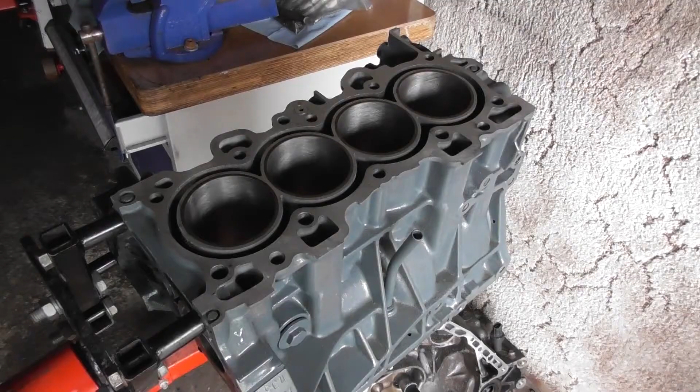So as you know, I've taken the wiring loom out of that other car and I want to put it into the EF. I've got my ghetto lighting rig here, so you're going to have to apologise about that.

What I need to do is take the interior out of this one, or at least take the driver's seat, possibly the passenger as well. I haven't got a lot of space in this garage, but I'm going to try and take it out, stack it in the corner, and see how I get on with that. But I need to remove some stuff first - drop the steering wheel down, the column down, and begin the process of taking the dashboard out.

So I've taken the battery out to begin with. You take the two 12mm at the front, put the seat forward, and take the 12mm out the rear, and then this seat is good to come out. I'll do the same to the other one.

Right, this is a better setup with the light shining through the sunroof. Anyway, I've taken the front two seats out, and then I'm just going to take the back two seats out.

So these upper bolsters, they get taken out with this. If I just lean, obviously put the seat forward, comes onto this. I'm sure everyone knows this. Take that out there, okay, top side of the seat. And you'll see this comes out then. Then you can just take it forward. So there's one, do the same to the other, and then you'll have both of them out.

Reveals the 10mm, here. And then you can just basically pull this up and then take this whole seat out. And it just reveals the fuel pump, things like that.

But the logical thing to do next is take out the central console, and I've already taken out the fuse cover - you can't see a lot of this stuff. So you just take out these 6 in total crosshead screws, one there, one halfway up, one there. You have to drop the dashboard, drop the glove box down to reveal that one, and then this will come out forward.

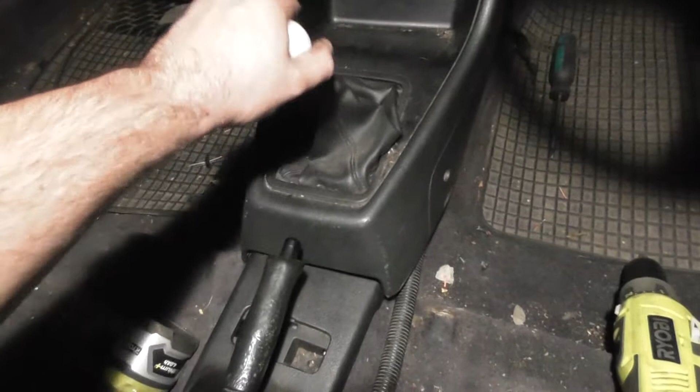Then you're going to remove your gear knob anti-clockwise, and this one, I'll eventually get it off. Alright, this is a nice Buddy Club neoprene one, nice. Put that to one side, and yeah, drop the gear stick back, and then we should just be able to pull this off.

The handbrake's out the way. Well, I'm not going to do it with one hand, but either way you get the idea. Just be careful as you pull that out of here. So handbrake up was easiest, so that's taken that out. I always leave the handbrake down on Civics because of the mechanisms and the brakes get stuck.

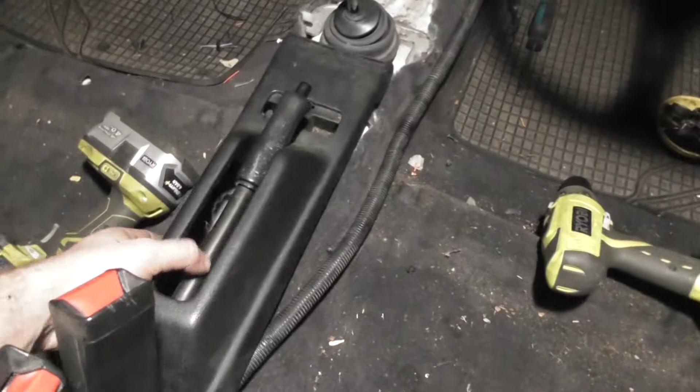These bolts are long gone for this thing, so you should just be able to push that forward maybe and jiggle this out the way. Maybe up. Yeah, up again. It's better, that's out the way.

Okay, then we can take the glove box out, and that is just on some screws on the right and left at the bottom there. So glove box out the way.

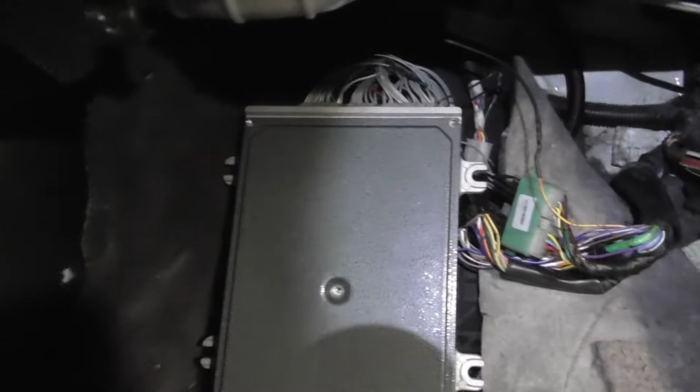Then this ECU would usually be under the carpet, I guess. So probably not a bad idea to undo that, put that out of the way. And then it's just you need to undo these screws around the heater controls, and yeah, you can take off this at the same time, but I don't think you have to. But I'll probably just take as much out of this as possible to make it easy to manoeuvre.

Okay, so ECU's out. Obviously take the lambda gauge out, and that was all non-OEM wiring anyway. But yeah, this is just for the stereo, so that can go back. And then yeah, I can drop this steering column down.

There's this little retaining clip, a little C-clip that needs to be popped off, and you can take this whole bit of plastic off, drop this down, but not before undoing the couple of connectors which are connecting the steering - the key barrel 3-pin connector, which goes to here, and then we have this 4-pin connector which goes straight in there, which is the 4-pin connector that says A next to it on the fuse panel.

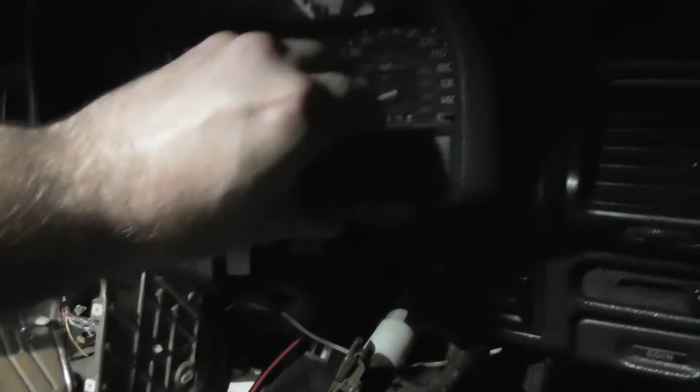So that means I can drop this down and begin working on taking other things out. The next thing will be the binnacle here, so I'll undo that. I think it comes out by just taking these switches out. The easiest way is to get a non-mar tool and prise those two switches out. I believe there's two screws behind them, so we'll do that.

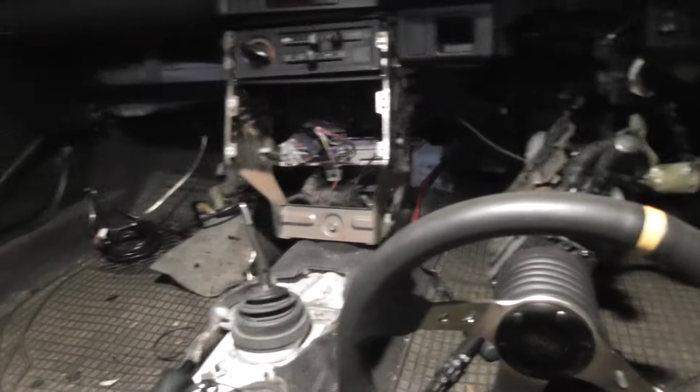I'm back in the car, and we've got a change of idea. I was going to put that loom in that I've taken out of the other car, but I've managed to secure myself a loom from a CRX VTEC 1.6, the OBD0 loom, and I'll take you through what I'm going to do with that and some of the reasons behind it. Some of it's due to getting the indicators and the dashboard working like stock, which is going to be difficult, realising the clocks from the other car are going to be very hard to fit. So I think I'm going to fit that loom instead, but either way, I'll show you what I'm going to do.

And that means I really want to get these stalks off as well, this whole column off. So I'm going to use the column from the VTEC as well. This is from a shuttle, the older style shuttle, 88 to 89, it's got the hazard switch on top. I really just want all the switches and connections to be the same, so I need to take the steering wheel off.

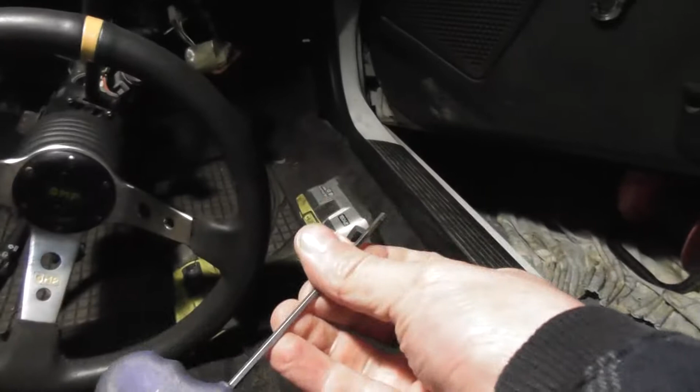So I'm going to undo these Allen bolts for this aftermarket steering wheel, and then take off that central nut after that. So take off the Allen bolts first, with a little 3mm Allen key.

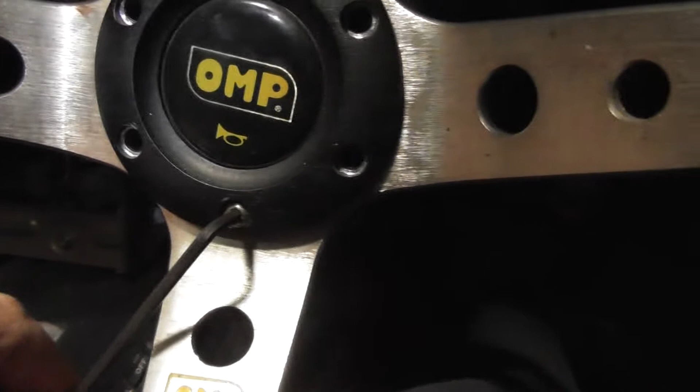We've all had this happen to us, but the Allen key on one of them was a bit rounded, and as I took it out, the 3mm Allen key started to slip. But fear not, I've got an Imperial set as well - 9/64, hammered that in, and then I'm actually undoing it, so that's nice. The tip is to use a slightly different size if it goes a bit rounded, hammer that thing home, and hopefully you'll be able to undo it.

So good luck. There we have it, I've undone that. This ring comes off first, then this little horn, and it's got a little connector on the back here. So that's undone, horn comes out, and then reveals this, and then I can just undo this main nut and take the boss off. I might have to connect it back to there to do that, so we'll see.

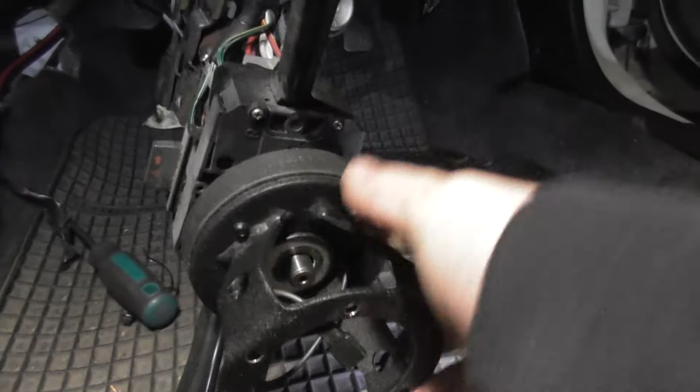So, 19mm, we'll see. There we go. Yeah, that's that, and that's the boss off.

Now I can just take - I think there's a 10mm down there - and take the column off. Taking this bit of plastic shrouding off the column reveals this little 10mm here, so I'm going to undo that, and then just take the whole column out.

Okay, so that's been taken out, and I've got the 10mm bolt here, I'll just put that back where it was, and then just undo these clips for the stalks, and then take the column itself out.

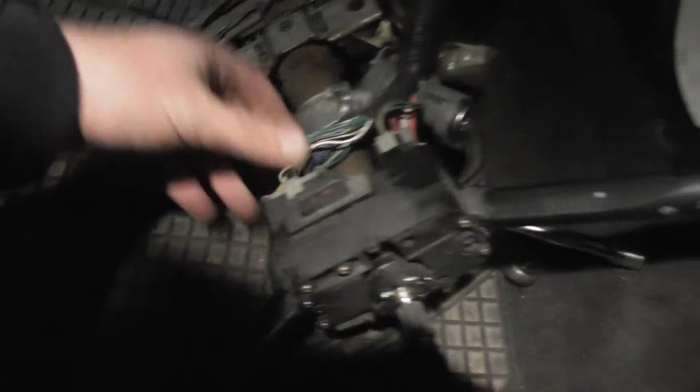Now it's time to take the dash clocks out. Here you need to take this binnacle out first. There's one there, and there's one under here, and I believe there's two actually. Let's have a look. Right, yeah, look here, you can't see, but there's one here underneath this thing, and there's another one under this cover here.

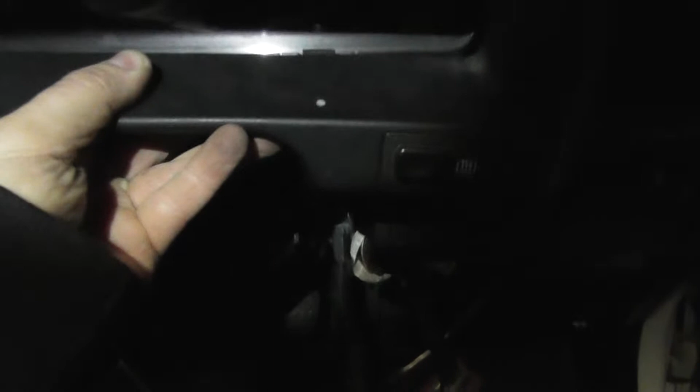So that will reveal the dash clocks themselves. And when that's moved forward a bit, I should be able to push these two switches out the way, forward towards me, and that will enable me to take this whole binnacle out. Okay, so with those removed I can take this forward, and obviously there's this shift light, glow shift light thing on. I'll have to cut the wires for that one, but I think that's only got power, earth, and the trigger, the blue trigger switch wire. So I'll remove that and then take this binnacle out of the way.

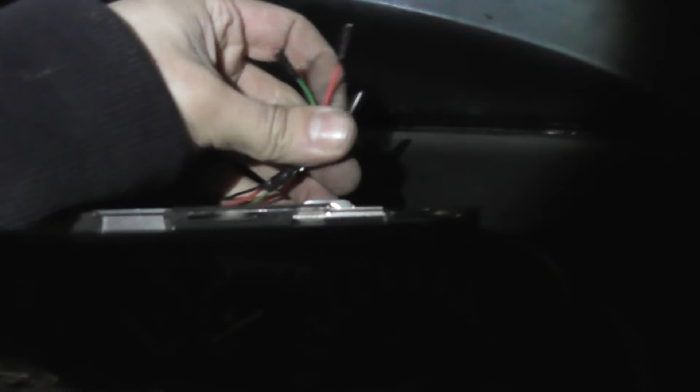I was saying before, reaching behind here when this whole thing's out means I can push these switches out enough to reveal the connectors on them. So I'll just undo that - the 3 wires that have been snipped. We've got the power, the red one, ground, black, green is the trigger, or the tacho switch.

This is the speedo cable. You can just press on the side here, on the side here, on the side here, and that removes everything from the back. Then we're getting very close to actually removing the whole dash.

Removing this dash, there's a number of key points. There's a 10mm bolt down here, and up here you can see that on top of the dash. You need to come in here with this kind of tool, lift this up, and this reveals a 10mm there. The sides here, see there's a 10mm in the air vent.

Usually that's got a screw above it, but I think that's missing. Anyway, remove those and get those 10mm out of the way, and then I don't think there's a whole lot more holding this in. Pulling this side cover off and taking that 10mm out. Shouldn't forget the one under here, and the same the other side.

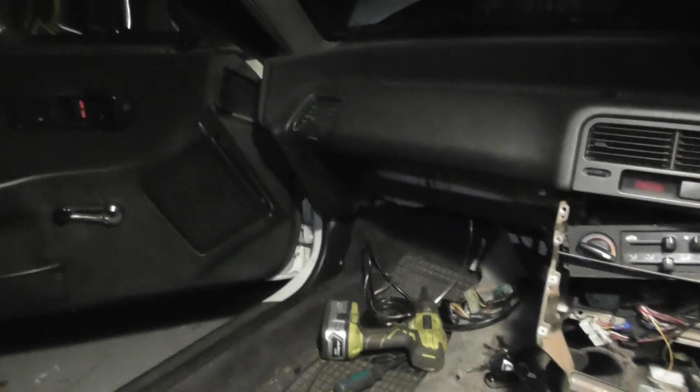And then this whole dash is pretty loose. So I'll have to do the same other side. I've got that other 10mm bolt out of the left hand side, and I've taken a couple more screws out of holding this dash in.

There's one underneath there, which was a 10mm, and there's also another one behind the glove box, which is a screw but with a 10mm Honda kind of thread screw there. And then this I think is ready to come out now.

Yeah, so I can take the whole dashboard out. Got to be careful because there's connections for the clock and stuff. So I'll just see if I can undo that.

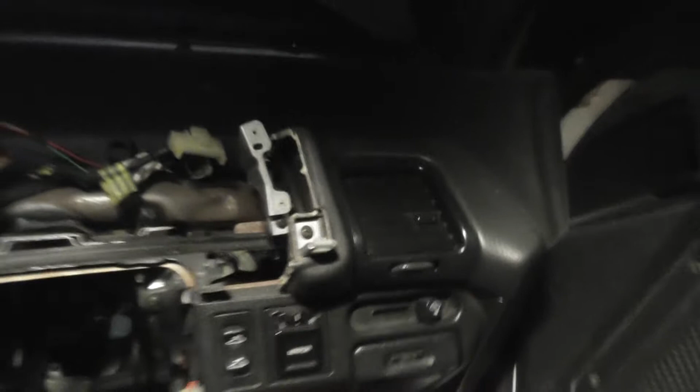Also there might be a connection over here for part of these switches, so I'll just pull out the switches. There's a little thing, I don't know if that's connected or not. There should be a cable connected to that, the recirculating air or not flap. So just take those out and then take the whole dash out.

So now it comes to the point where the dash is out and you just need to take out all the cables that are inside here. I'm going to mark some of them up as well, and just try and pop as much as I can through the firewall, or some of it will actually have to come from the firewall through here, so I have to figure that one out.

So really it's all just kind of basic stuff of the wiring here now. As you know, I'm going to use a different loom, so I need to just get all this stuff out. So that's what I'm going to do next.

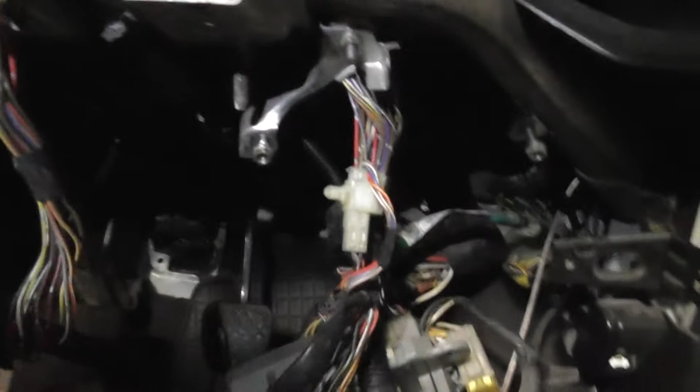So I've taken the fuse box down. It's just on these little 10 mils, and then the whole thing comes down. And then there's other stuff such as the brake stopper. So I need to take that, and basically just keep on working through and try and disconnect as much stuff as possible.

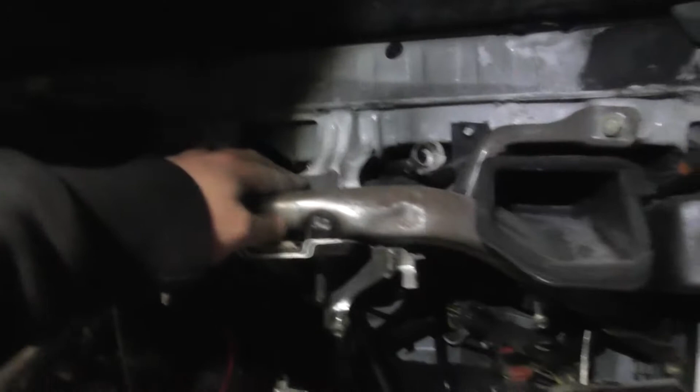So these are just on 12 mils. There's two here, there's one here, there's one here, there's one here, and there's at least one down here. So I'm going to just try and remove this bar now, and that will probably give me some more access.

So that means I can just take this duct out, so that's nice. And when I put it back, I hope I remember to put this duct in first. I seem to remember forgetting once and having to somehow weave it in. It's almost next to impossible. So just take that out and hopefully remember to put it back first before the crash bar.

And then you can see I've got better access to all these wires which go up in here. So this whole thing goes to the back of the car. How amazing would it be if I didn't have to even do anything with that? If I could just unclip that. I really hope that's the case. That'll save me a lot of work, so I wouldn't have to strip the back of the car as well.

So let's have a go at that. This is the one I was showing you earlier, and there's a couple more wires as well which connect to the back of the fuse box. This one connects to there and a few other places, but this one connects to here, as I was saying. So you basically just take them out, and then we're left with...

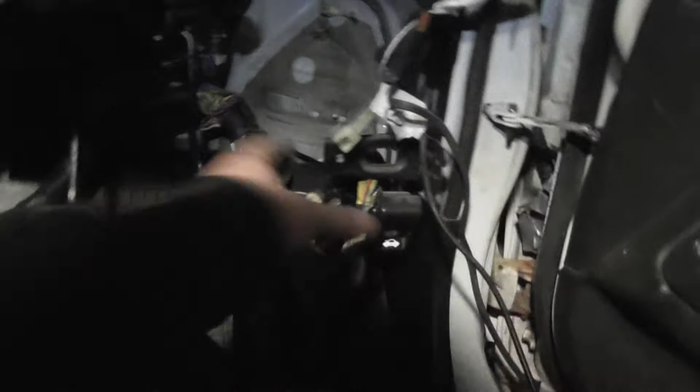All this is still in the car, so I'm going to the back, but I'll leave that. The rest is just basically looped around here and in the footwell here. So that's all we've got. We can go to the engine bay now to see how we can go about taking that bit out.

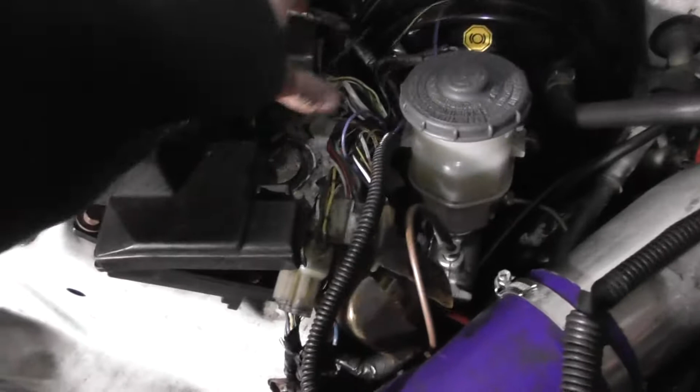So, engine bay. This is again fairly easy. Stuff like earths, 10 mils, you need to take off. Then obviously in the fuse box, open that up and take stuff like the battery terminals off, and then also I'll probably take the inlet manifold off as well, just so I can have better access to the heater matrix, because I'm going to get a new heater matrix as well. So this is all easy stuff.

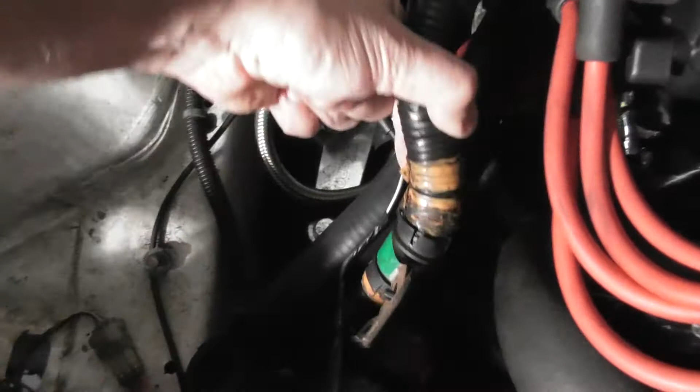Yeah, it's going to be quite easy to do this, I think. So I'm just going to basically go step by step and start undoing stuff. I've dropped all the fuse box wiring and everything out of the fuse box, and then tucked it down here because it's going to have to get pulled out that way. So that's all pretty much good to go now, because the rest of the wiring is about here, which is all to the engine side.

And then we've got this stuff over here to contend with, but I'm going to pull out the stuff that's inside the car on this side first, and that'll be one part done. Then we've got all these parts.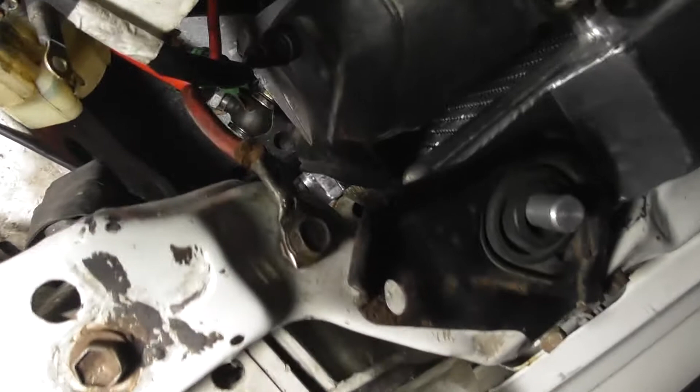I've just pulled the wiring back a little bit, but I need to do things like this little 10 mil that's on there, and take off all the wiring for the headlights and radiator fan and all that stuff.

It's snowing. Anyway,

Continuing with this, so I'm going to take out the light here, which is the indicator, because I've already taken out the rad fan here, and this is all the switches - sorry, all the connectors for the lights and stuff like that here. And that all feeds into this bit which goes into the driver's side, or right hand side of the vehicle as you sit in it.

So I'm just removing all these things, and there's actually a horn somewhere as well. I need to do the same on the other side, so I'm taking out this indicator with 2 screws, and then I can pop the connector off that. I've taken the connector out, which is this one for the horn, and then you just take a little crosshead...

...screw out of the side indicator, and then you just take this connector off, and then there should be all this bit of loom free to come out.

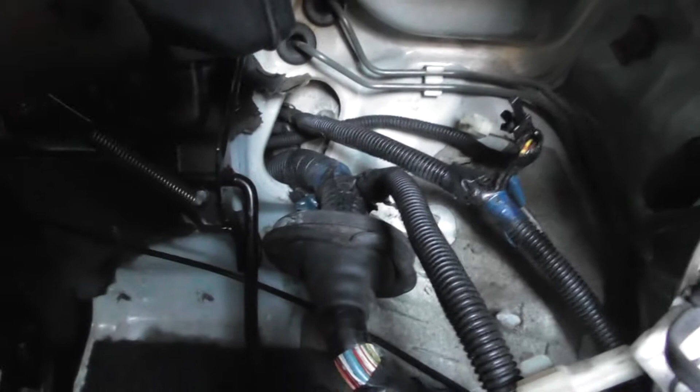Back in the car, I should be able to take this thinner one out first. I can try to put it in a good way with the engine bay so it might have a chance of coming out. This is an easy 2-person job, but what you need to do is make sure you don't just yank it. You need to make sure it's not snagged on the other side, and then just feed all these wires through the bulkhead.

So that's it, it's all through, and I'd say the best thing to do is take the small bits through first, and then try to feed in the larger bits. Take off anything like relays or anything that will be too big to get through that hole, because it's not a massive hole to go through the bulkhead. And that's that bit done.

Then I just need to go around the other side and take this bit out. Hoping it should be relatively straightforward, but it's all kind of the same types of stuff. So we've got some wiring here, probably a bit less wiring, and some wiring down here as well. Again, just going to be taking all this stuff off and trying to keep some order in it as well.

So I've undone most of this, you know, from the injector box, for example, the knock sensor that I've had to put in.

What else? The VTEC solenoid wire I put in, basically some of the stuff that came over from all the stuff I put in myself. There's 2 parts where it goes into, down here and just below the resistor box itself.

Annoying bit is that the wiper pump connectors mean you think you've got to take off the front bumper, which is a bit annoying, so I'll have to do that. But other than that, this thing's ready to get popped through, so I think taking off the front bumper is the next thing I'm going to work on, which is fairly easy. I believe it's just 2 bolts in here, and then some screws in the wheel arch.

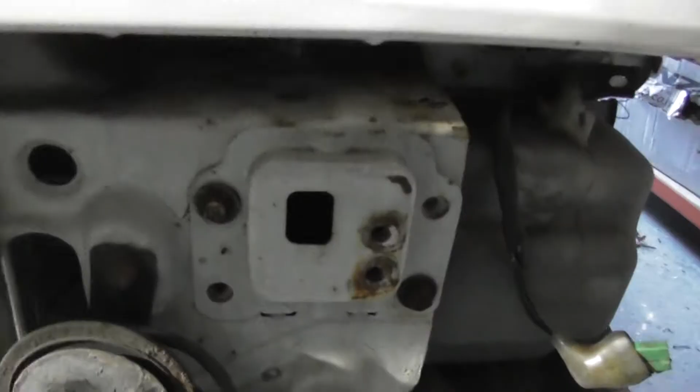So 2 of those in here, take those off, and I'll take the front bumper off, and then I can take that out. Like I say, a couple of 12 mils either side, and then those little screws and the bumper comes off. This is what I was talking about.

These little connectors down here for the pump, so I'll just label which one's which and just pop those off. Take out this, it's always an idea just for getting the cables out of the way. Taking out the 10 mil there, 10 mil down here, and 10 mil there. So this pump reservoir is all loose, and then you can get all the wires out.

And then now I can just push through this one here, this little rubber grommet in the back here, it's hard to see, but push through that one, and then get all the wires through here as well. So that's what I'm going to do next, it's that extension wire, which is the wire thing that I've made. That's out.

And then now I should be able just to pop this back, this one down here, back. This is all of this chassis wiring thing, so let's see if I can do that next.

So I got the party started by pulling the little grommet out the bottom there, and then I'm just feeding all these wires through, making sure stuff doesn't get snagged. So just kind of do that and post it through the bulkhead like so.

One thing I will be leaving is my aftermarket wideband lambda, but everything else is going to get posted through. So all through here, and that's the full wiring loom, the chassis loom from the front of the car out.

I told you I've broken, well, I shouldn't say broken, I haven't broken anything, I've disconnected the front from the back chassis. And I can just basically remove this now from the car, and that's one stage complete.

I'm still waiting on the OBD0 loom, and that's going to require some modification as well, so I've got both options now, so I may as well take this out and just loosely connect the OBD2 loom, at least to the engine, and just to see if I can get the thing started like this, just to see if it runs right.

So that's what I'm going to do, take this out and then take the loom off the engine and put a standard B18C4 loom on. So first of all, take this out, and then I'll take the loom that's on the engine at the moment off. Now comes this part.

I'm just going to undo the loom that's on there now, which is my modified OBD0 loom that didn't quite work out. Anyway, I'm going to take it off the car and see if I can get this thing running just with the OBD2 loom, which is the standard loom. I think it should run like that, so let's take this all off and see what happens.

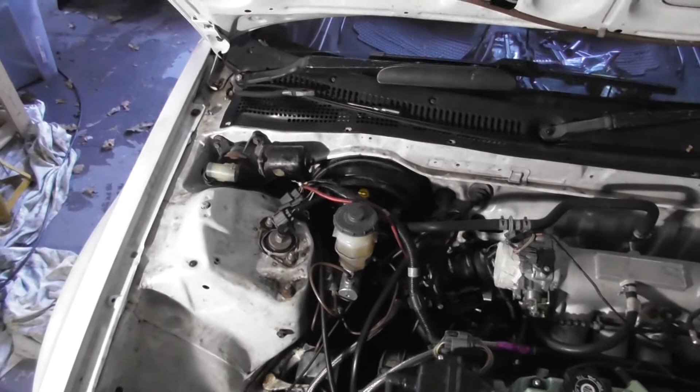B18C4 standard loom went in without a hitch, which is nice, and then basically we can just connect everything else up. So we've got these here, this is part of the passenger side, the left hand side sitting in the car loom, and then this here, which is part of the driver's side or right hand side as you sit in the car loom. So then we're going to put the rest of this loom I have here, the chassis loom, inside the car, and see how we get on.

So as you know, I'm going to get the OBD2 wiring working in that EF first. Here's the tank, and this is the connector for the fuel pump. See the lines coming out of it, and this must be the level switch sender or whatever. So this is the fuel pump, and this one here is for the sender.

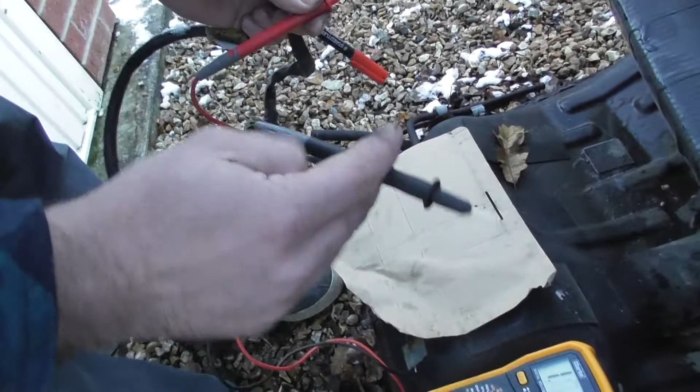I'm just going to do a quick pin out, using continuity testing, so that if the wires touch, you get a very low number. This is the connector I'm wanting to replicate, because this is what's on the loom.

What I do is basically stick it on a pin and see which of these it connects to, then go to the next pin and the next pin. So first let's just see if I can get one of these pinned out.

That pin goes to there, so that's to do with the sender, so I'm not really bothered. Mainly the ones I'm really interested in are for the fuel pump. Stick it in there, and that goes there, just checking around the rest of them. This bottom pin goes to this one, and I'm betting if I stick this top one in there, it goes to the bottom and not the others. So it's just these two pins here, and I can get the fuel pump working.

That's essentially it, and I can change the connector on here for the one that's in the other wiring loom, and that way I can make it work for the car. So that's what I'm going to do next.

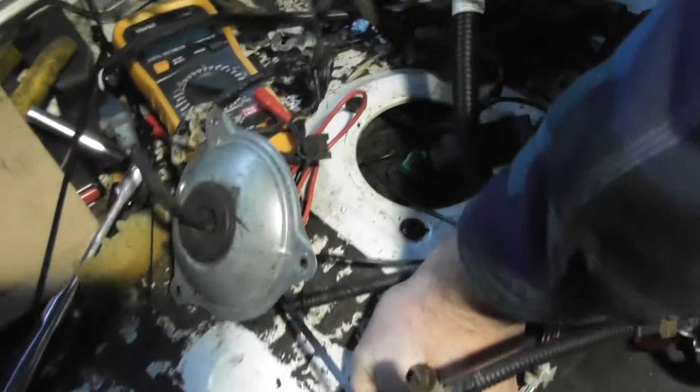This is the wiring. It's a little hard to see, but this is the wiring that goes from the factory OBD0 stuff, and then this goes to the fuel pump, which is the wire that goes inside here towards the back of the car, and on top of here, this one's for the fuel level gauge.

All I've done is take the wires out of the OBD2 loom and put them to the bottom two connectors here, just so it runs the fuel pump. I think it'll run the fuel pump the right way, but we'll hear it if it goes the wrong way.

What I'm trying to do is get the wires through to the bulkhead. Usually these connectors here would go the other side of the engine room, but it's a bit tricky to get everything through such a small hole, so we're just going to leave them connected this side.

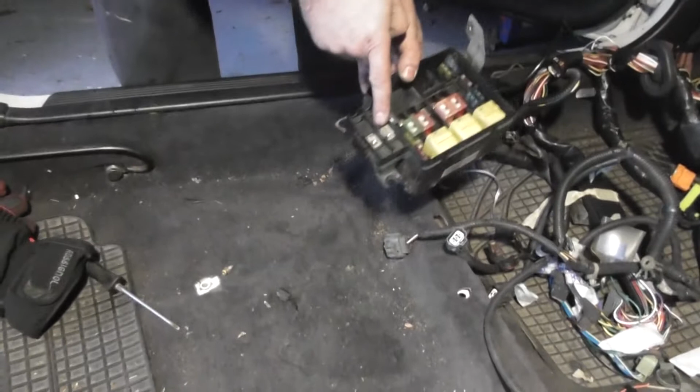And then this wire here, this is part of the wire tuck for those of you interested. So we've got the engine bay fuse box, and then we need one wire here I've just taken off, which goes to the battery and is also connected to the starter motor, and this connector here, which is connecting power to the rest of the engine bay harness.

I'm going to connect both of those two up, and that's going to have to sit there for now, which will be okay. A lot of this isn't actually that important - this is for the ABS wiring and some other sundries.

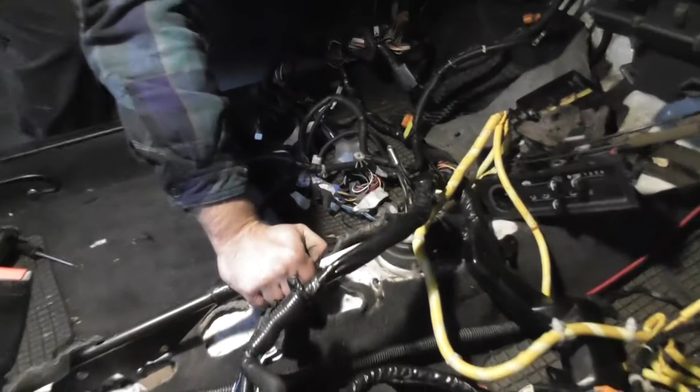I'm really just keen on connecting the wires that are going to make the engine run, so we'll see if we can do that. Right, so I've connected the ECU here, just a standard one, and over here I've connected the clocks. And then which ones are they, Paul?

Sorry? Which ones are they? From the VTI, from that one over there. Let's see if I can.

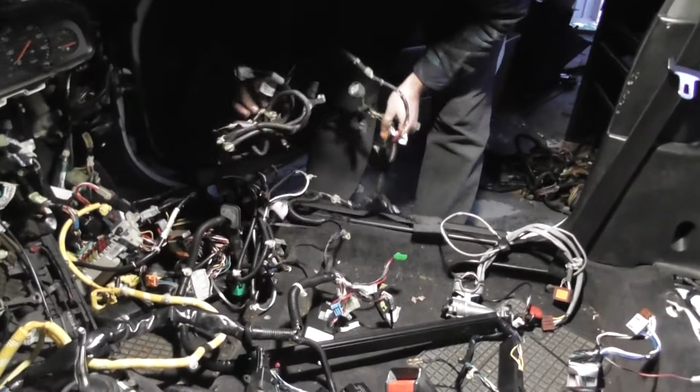Yeah, this is clearly somewhat of a mess. I'll come around the other side. Basically I'm just bunching stuff up that has no relevance. This needs to go through because this does have some relevance, but this is all - what's this?

This is all stuff to do with the wire lights - the wire tuck then? This is the wire tuck. Looks really organised actually. Yeah, cheers mate. Looking good, the wire tuck's going pretty well.

Going pretty well, yeah. This needs to go through, because this is for - so I'm going to have to hand you this, mate. This is going to go through to the other connections, the ECU. And then basically I've got to connect this up and then put the battery on and see if it starts.

Right, so these are the wires under here. There's just two main ones I'm trying to connect. This one here, I can get my hand in, and this one here - these two. So this should reach. I'm just going to go.

There's one, and here's the other one. Okay, then go back into. Is that it for the? I think, let's have a look. Yeah, so it's just this side of the loom connected, that side of the loom. Let's have a look at that one. That's all in there. The heat, what's that?

The heat sink, that's for the old injectors. Don't worry about that. Okay, we're going away from those injectors, OBD0 injectors. And now I can somehow figure out where this goes. So it goes like this, one goes in here, right? And then this one goes to another brown plug.

There you go. Points the other one as well. So this one in here, this one in here, this goes to this key barrel.

Whoa, whoa, Joe. Those struts are done, can't believe it. Are they original? Yeah, probably.

We're obviously not connected. Yeah, yeah. Haven't connected enough earths, I think. All that, battery's got no charge. Do you want to get the tester? Multimeter. Battery's knackered. Great, you got another battery? 2 volts in it. What about, can't you just use the other car's batteries? Didn't have one.

Right then, so in the ECU we have a space for a chip, and the chip I'm going to be using today is this one, which is from H-Tune. Just put it in there, show what it looks like. I don't know, it's in like that. The little dimple is there, and you can just latch it. There we go, that's latched in there. Put the cover back on, with these little screws in it as well, and then we'll see how we go.

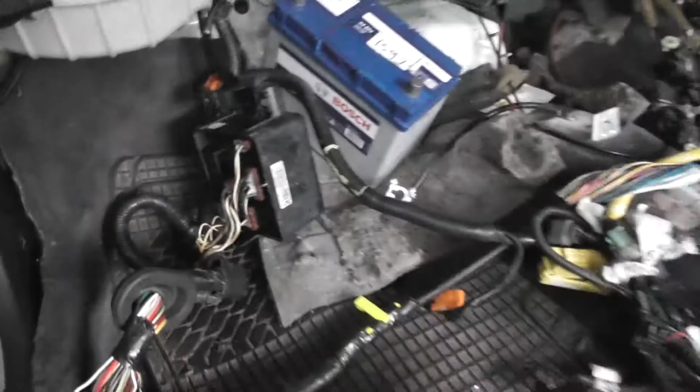Back to the car, I've connected up these wires here. I've repositioned the battery here because the wiring I was using to go to the back of the car with the battery is kind of not in the best condition, and this is just the chipped ECU. One of the things you need to do if you're using an ECU like this, in an MB6 or MT2, is you see the plug almost fits here, but you need to snip off these 2 bits of plastic at either end. So I'll just go ahead and do that, and then see if this thing starts up.

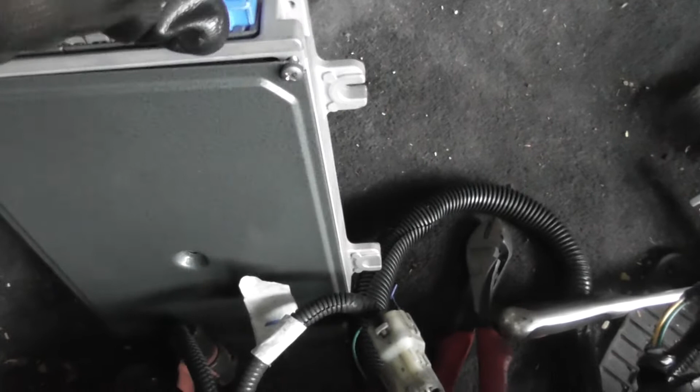So there we have it. Should just be able to slip this connector in now. Maybe not, just need to take a little bit more off here. That side's good. So yeah, just take off a little bit more plastic here, and that should slip in there like that. I should be able to start it.

So I've connected up the ECU. Interestingly enough, it needs to be the same key and key barrel which connects to it, which seems to connect to something else, such as I think possibly this box needs, sorry, not this box, this one. I think the key barrel is connected to this box that needs to be the same, so I've had to use this. I need to disconnect this from this at some point, but yeah, as you see, it wants to run, but it's not giving me any fuel at the moment.

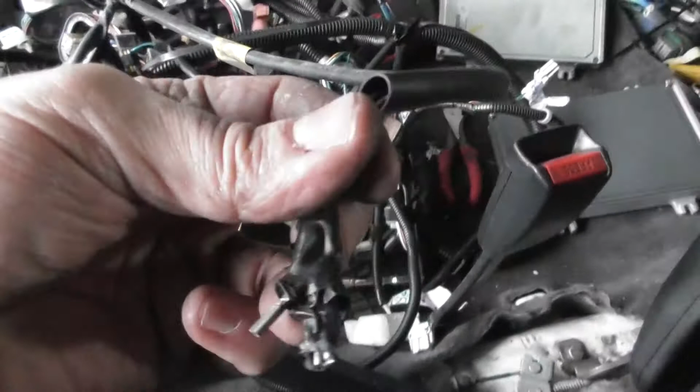So I've had a look at the connector, and it's not giving me 12 volts or any voltage to the actual fuel connector. So the next port of call is this crash sensor thing, this thing here. I'm just going to quickly pin this out and just see if it's dead or not. Bridge that, and then again I will check what I've got coming out of my fuel pump wires.

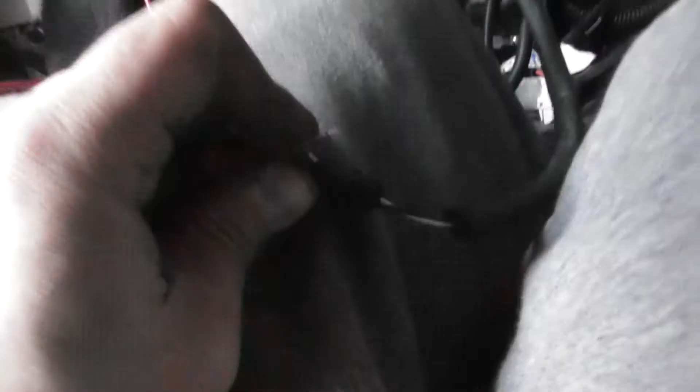So hopefully I get some voltage out of these now. Got the probe set up on my fuel pump wiring. I've got my multimeter set on 12 volts. And I've obviously got this bridged for this little crash sensor. And then what I'm going to do is try and lay it on there and turn the ignition. So let's have a look.

See, 12 volts and down. So what that means is it's going to kick the fuel pump over with 12 volts and then stop, which primes the fuel system. So I think I might start now if I just connect these up to my wiring. I'll show you what that looks like when that's done.

Wiring's set up, and what I'll do is move away from this mapped ECU and just put it on the standard ECU. Let's go. Oh, I hear a fuel pump. Not sure if it's running the right way, could be running backwards. Don't know, let's give it a go.

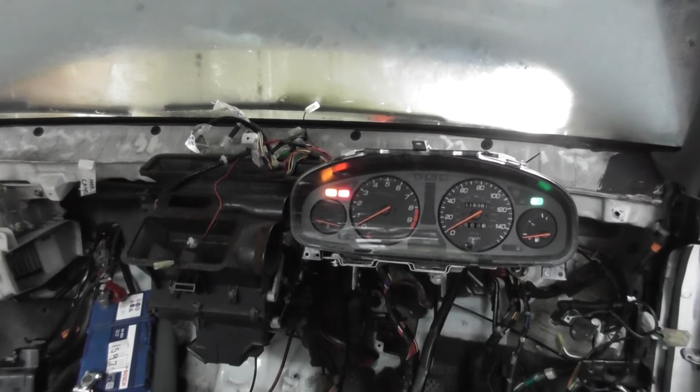I think that's running backwards. Let's just go and have a look at the fuel pressure regulator, it's got a gauge on it. If it shows nothing, then I think it's running backwards. And then it's getting pressure. Getting pressure, guys, so let's have a look. Let's see if we can't just get this thing going.

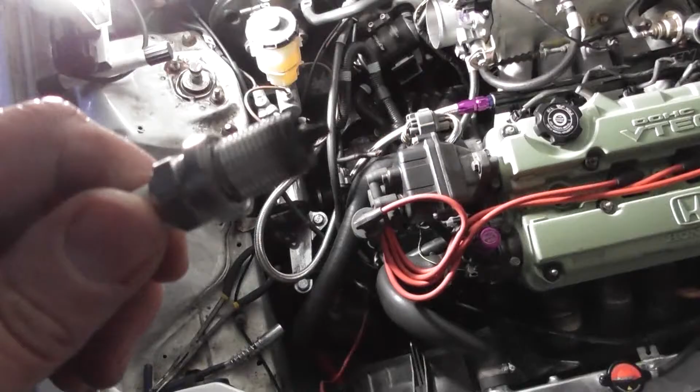Sounds tempted. So here's the spark plug I've just taken out. It seems like it's covered in fuel, so I think the car is getting fuel. But I want to just check the strength of the spark. Again, I think it probably is getting spark, because it sounds like it's going to fire up, but it isn't quite doing that. So I'm going to quickly check the spark after I've wiped the spark plug, and then clean the other spark plugs and give it another go.

Good strong spark, at least coming from number 4 piston. Now I've cleaned up all the spark plugs and put them back in. I've also found another earth I missed to fit, which is this one. Some of the earths will be more important than the others, but this one's going forward, it's pretty critical I think. So I've put that earth on as well. And then we'll give it a crank.

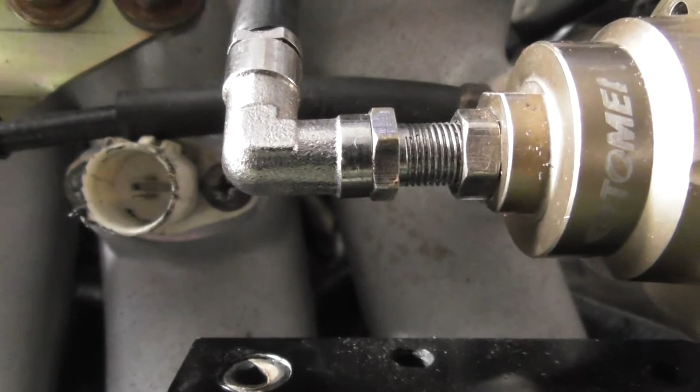This is the intake air temperature sensor, I've just taken it off here. Looks like we've got some crap on the connectors. So I think the first thing I'm going to do is see if I've got some ISO spray and just clean out this connector and put it back on. Thoroughly cleaned the intake air temperature sensor, and then see if the error is cleared, or I'll clear it and see if it comes back on again.

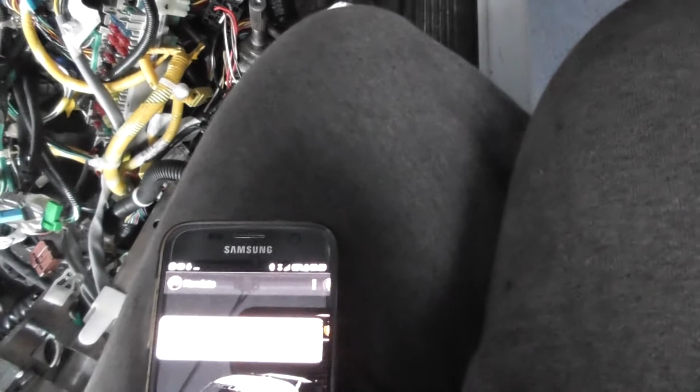Clear that error, I don't know if it will actually clear. Okay, seems to clear. Okay, need to reconnect. That's a slightly annoying thing about this.

I didn't like the air intake temperature. So, I don't know, maybe it's getting the wrong impression of the actual temperature. I probably need a new sensor, so I'll look to see if I can buy one of those.

So I've just updated to Hondata S Manager 2.6.6.0, which I think was released in November. And then the first time I've connected it up to the S300 ECU, it's upgrading the firmware. It's the first time since I've had it that it's actually done that, so it must be needed to work properly with the latest install of Hondata S Manager.

So there we go, just doing that, and then we'll see if we can put some maps on this thing. We'll just load on the map I've been using. Open, it's the GSR with the knock disabled. Okay, there we go, and then I can just push that down onto the ECU, so I will upload that. So that's uploaded to the ECU, and then I'll give it a crank.

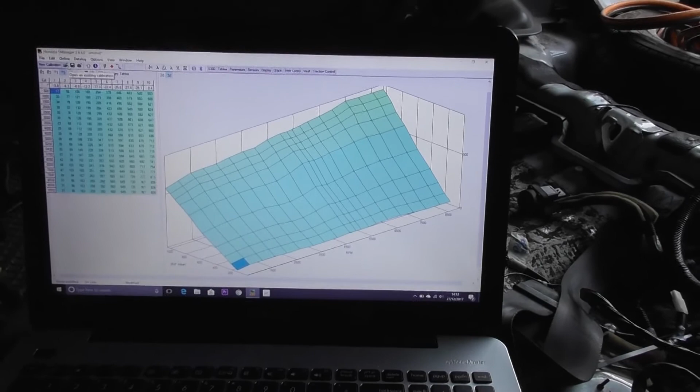Okay, give it a crank. It's tempted. Give it a bit of throttle maybe.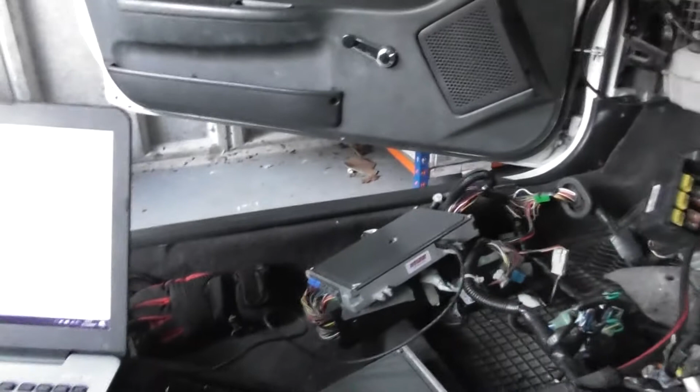So it's running, which is further than I've been previously with this ECU, I have to admit. Let's look at the error codes, clicking the online button there. So I've got one: intake air temperature and idle control. Let's give it another go.

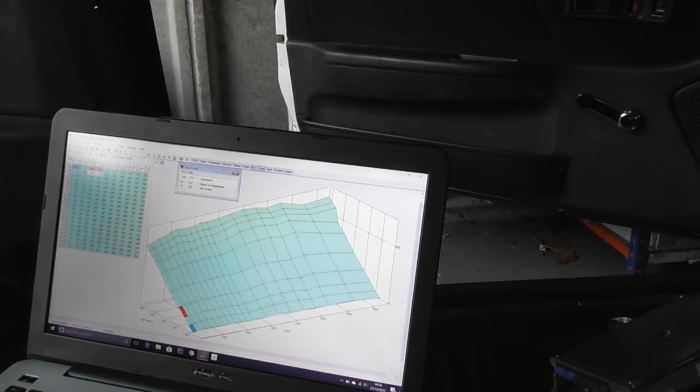Okay, so it seems like the intake air temperature is complaining, and the idle air control valve. So I'm going to have a look at them. Switch those two plugs around and we'll give it a crank.

Let's go live again. Okay, clear these codes. My intake air temperature is actually faulty, but either way, give it a crank.

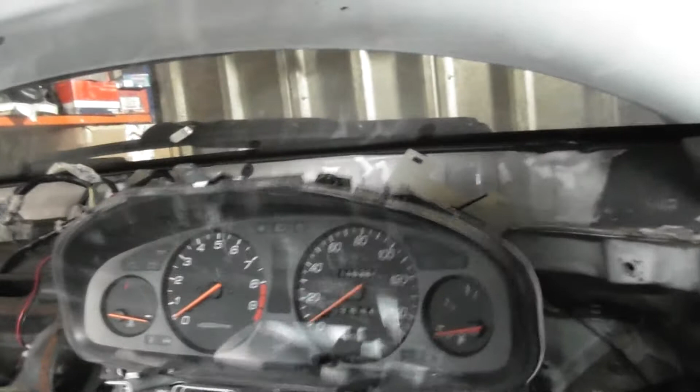Doesn't like either of them. I wonder if it's my wiring, because I bought this engine wiring loom, and someone had already done some stuff to it.

I have other looms available to me. I have this one that's an Integra loom. It's kind of similar but different, a couple of plugs, so I might take this loom off here and compare the wiring to my Integra loom. So this is the B18C4 loom and this is the B18C6 loom. Now they actually are identical as far as I can see, other than there was one connector that I don't know what it is. It's this one. If anyone knows what that is, let me know.

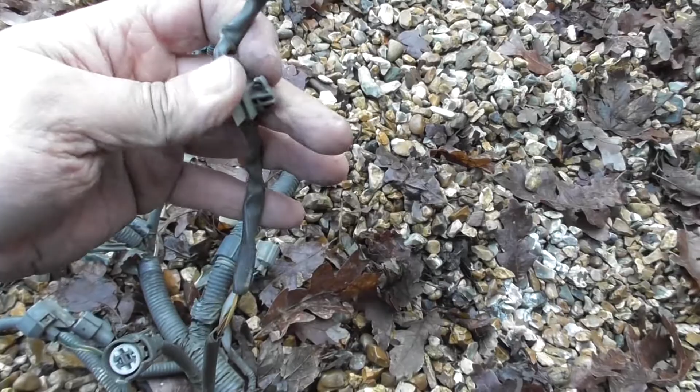But it's certainly not on my other loom, which is weird. I'm not sure if it's some extra thing that's on a B18C6 rather than B18C4. But either way, other than that, the loom seems to be quite well, it's the same. There's a couple of connectors I'm going to have to replace first, such as this one that goes to the alternator, that's been bust. And the white inlay bit of plastic is missing, so I'll replace that. But other than that, I'm going to try this loom and see how I go.

I need to also mention that there's no more VTEC connector, so I don't know where that's gone in the mix. This one makes me a bit nervous, the way there has been a repair, and I re-repaired this, but there's still a repair on here, and I'm not sure if that was done correctly. So I'm going to do modifications to this loom, changing the connectors to good connectors, and then chuck it on.

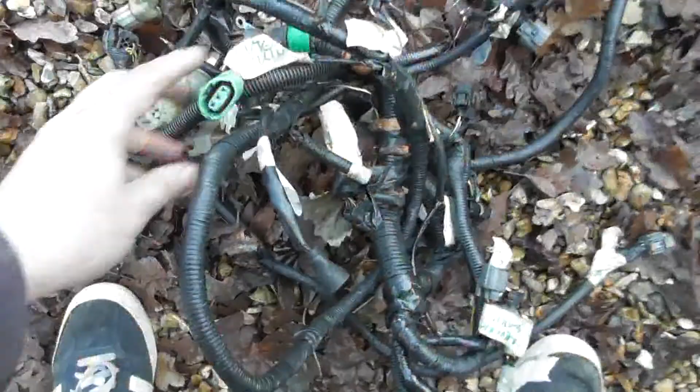This is another loom, the OBD one that I modified. Here we have it, this is the connector. Come in here with the flathead, pull that up, pick that out, put it somewhere, and then basically just shove these back. It should all just go back now.

Always easier said than done. Got the middle one out. There's one. Okay, then this one. You can sometimes just get started. There's one.

Okay, it's a connector, and then I'll just do basically the same here. With this loom, this is the broken connector, so there's a bit missing, and just reverse that same process. If you look at the connector, on the left hand side, this is the back of the connector, we've got white with red stripe, black with yellow stripe, and white with blue. So obviously we put the other one back in the same way.

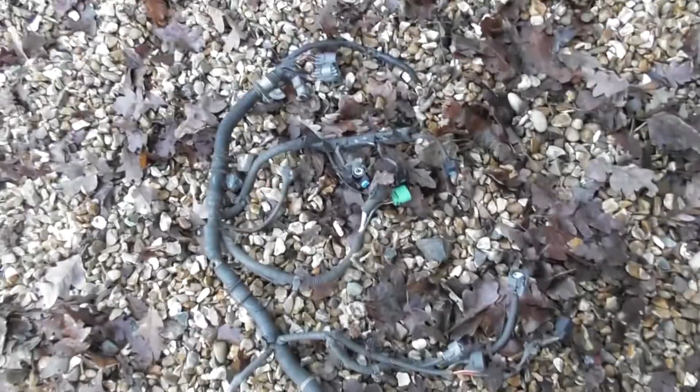I've got one connector I don't know what it is yet, this one. Not sure what that is, but it doesn't correspond to anything I've got in the other loom. But anyway, we'll just put this in now and see what happens. It's just a matter of feeding this back through, which I'll do now. Okay, so that's all the B18C6 loom. Like I say, I've still got this connector up here, I'm not sure what that is. So we'll connect inside and then give it a start up. So, new loom.

Intake air temperature. Just give it a flip. Okay. Seems like I need a new intake air temperature sensor I can handle, but it seems to be running. Other than that, that's pretty good, much further than I've been before.

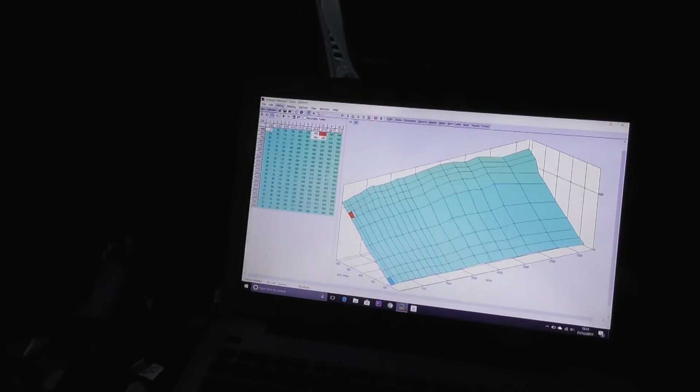Yeah, and you see it's got, oh, there we go, it's flashing the DTC light as well. So I will give it a go to clear DTCs and then just flick them off, and then go up here, and this little lightning bolt is going online. Still got an error code. Intake air temperature, so it's consistent.

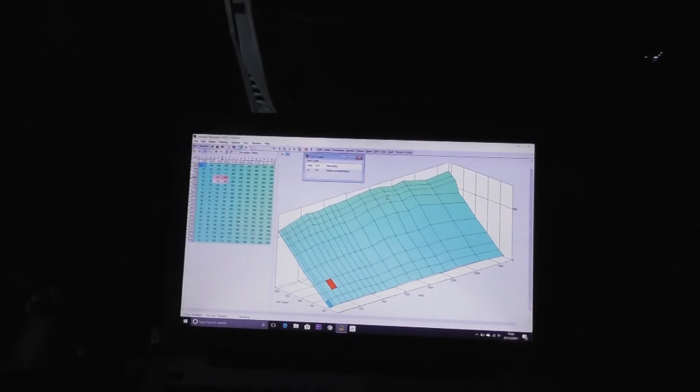I mean, it's running, and it's not spitting out lots of crap from the back. So other than the intake air temperature, we're pretty good. And you're going to love that. So next we'll be buying a new intake air temperature sensor and seeing what I can do from that.